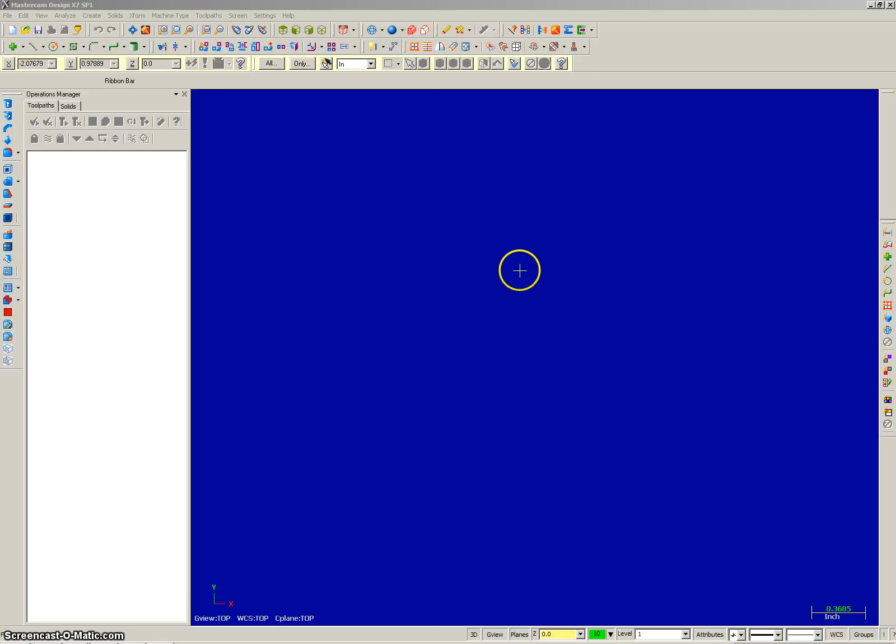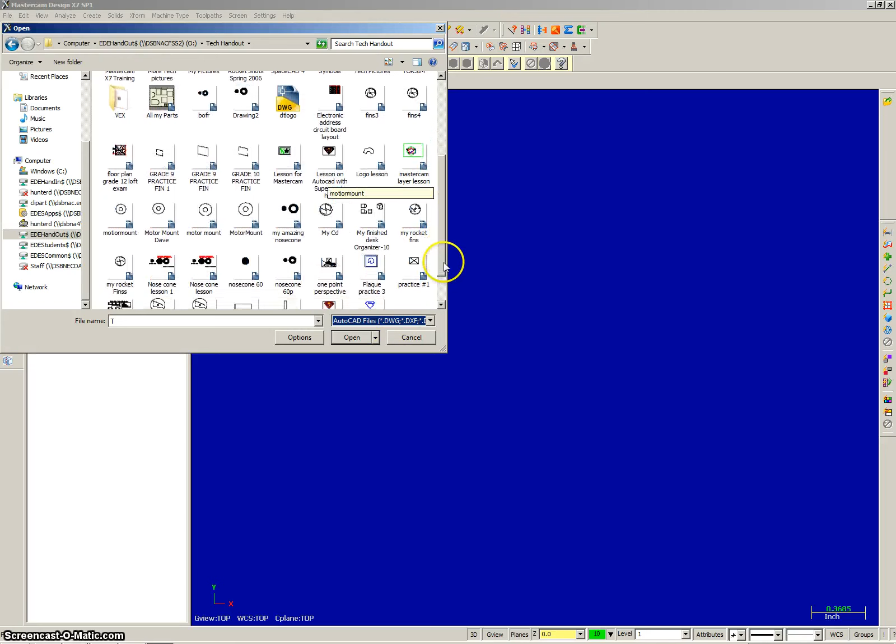We're going to grab an AutoCAD file that's already set up with tabs and a couple of fins on it. Sometimes you might have to accept the licensing agreement, but I've already done that today, so don't have to do it again. So File and Open. We're going to go to the Tech Handout folder, grab this particular file, and look for AutoCAD files. There we are. If we slide down here, you're going to see one called My Rocket Fins. I'm going to double click it and do layout number 1.

I'm going to hit screen fit, just get it nicely in the center. So we're all set. This is a CD, so it's like 4 3/4 inches in diameter. It's got like a 3/4 inch diameter circle in the center, and then these are the 2 fins for my rocket that I can mill out of that CD, and they're all set up, and that was done in CAD.

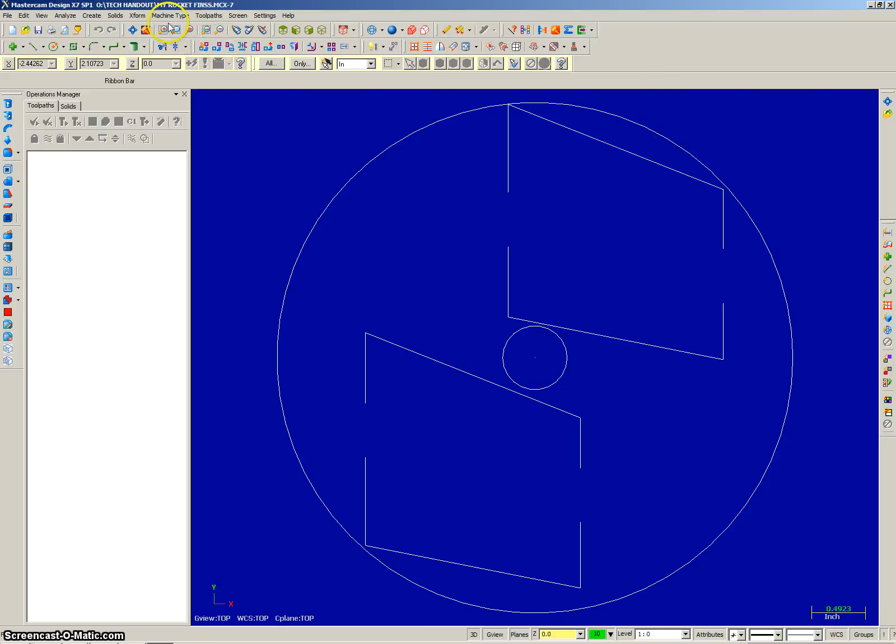We have to do tool settings next, and we're just going to call this program number 1. Doesn't really matter. The material we're going to select from the library, so it is acrylic, plastic acrylic. Checkbox it, and we're going to assign the tool numbers sequentially, although we're only going to use one tool, and it will be the 3/16 end mill.

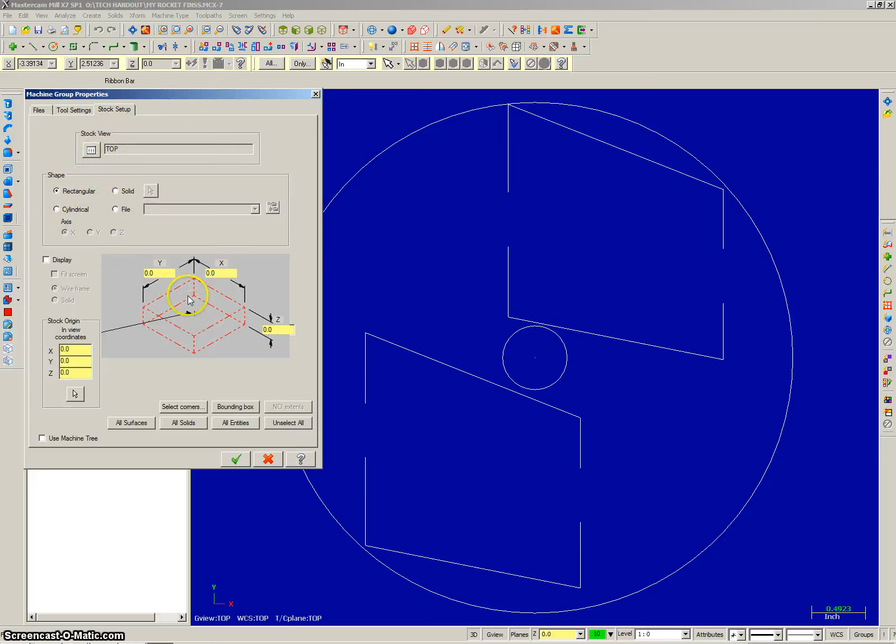Alright, that's looking good. Next is stock setup, and it doesn't give us an option for a circular setup. We are going to leave the center of the part in the middle of it right here. So in other words, this part right here is 0, 0, and this is 0, 0, 0 also. So we're just going to use 4 3/4 by 4 3/4 by 1/16 of an inch, because the CD is pretty thin.

So here we go. 4.75, 4.75, and 1/16. It allows you to use fractions if you want. And of course, again, we're going to keep the center at 0, 0, 0, and we're going to click that we want to display that.

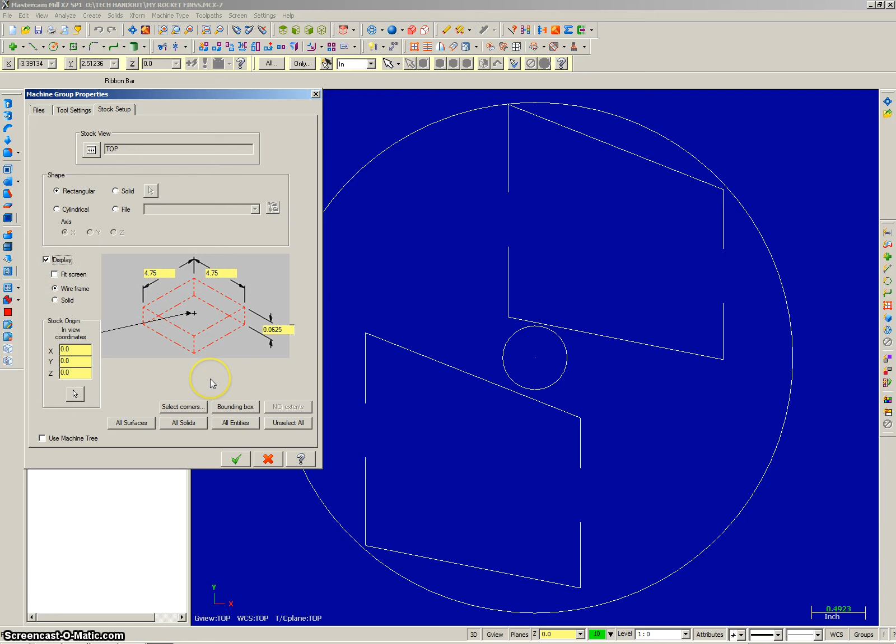And everything else should be looking good. When we check box, we should see the red box around. Now that's interesting, looks like the center's not quite at 0, 0, so we'll leave it the way it is. Maybe I'll make it 5 by 5 just so it fits in a little bit better. So I'm going to go back and modify that, we'll go 5.

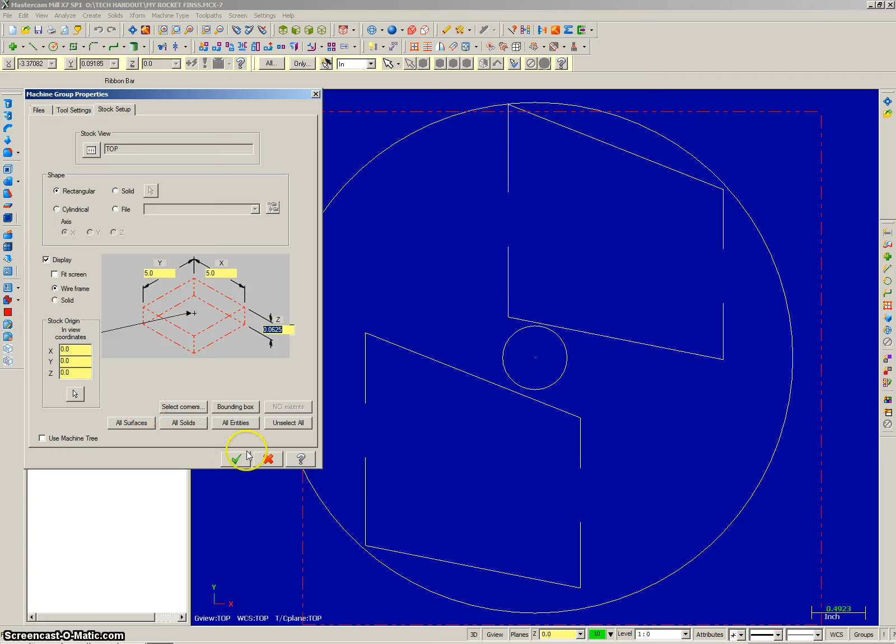Fits, generally speaking. Alright, we're ready to go. So we're going to go to toolpaths, and we're going to do a contour.

There it is, called My Rocket Fins. I'm going to check box it, and we're going to select these guys one at a time. So again, remember that this is the line segment, this is the center of the line segment. If I select down below here, then it's going to send the tool around the outside, which is what I want it to do, so that this fin will be remaining.

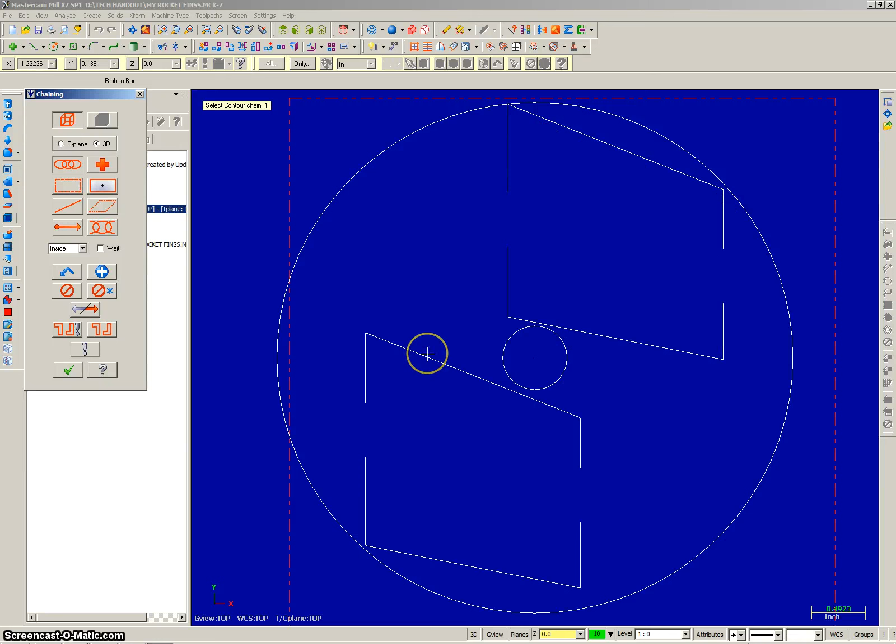So here I go, and I'm selecting it as a chain. I'm going to select the first one, it finishes right here. Then I go to this one, see, again, there's the center, and I'm above it. Click it, and it finishes here. Do the next one, click it. Again, this is a counterclockwise toolpath, which means the tool is going to go to the outside of the line, and the last one, there it is, counterclockwise toolpath.

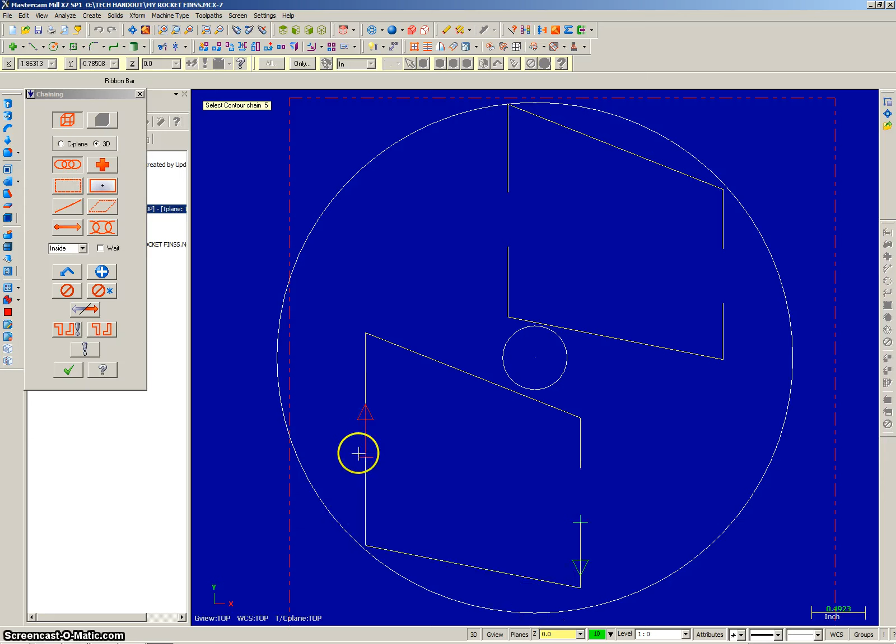So that's looking good, and if I checkbox that, now we have to do the information required.

It is a contour, we've already selected that. We don't have our tool picked yet, so we're going to go to Tool, go to the library, and go to the filter. We're going to turn them all off, so there are none.

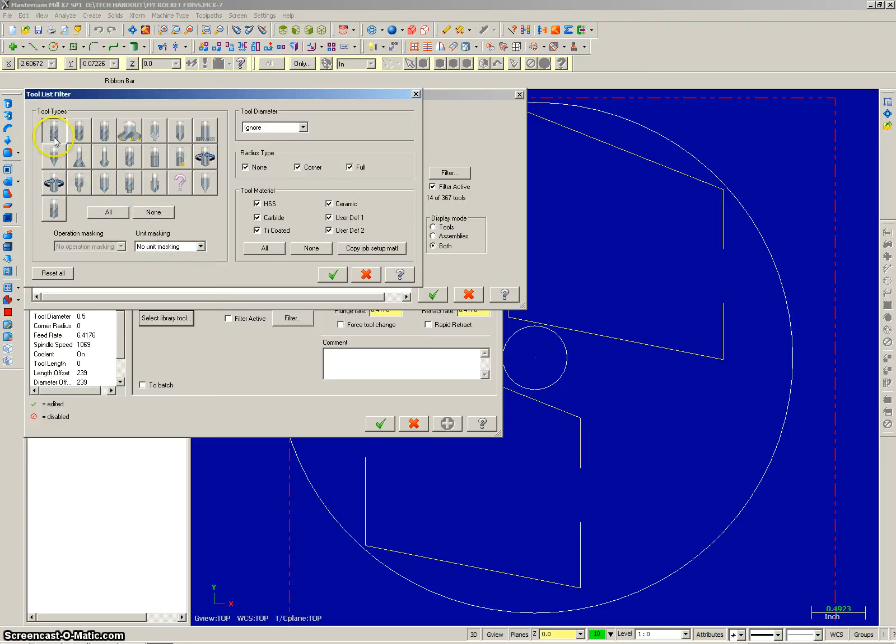Then we're going to select only the end mills. If I hover on there, see that's an end mill, and I'm going to click checkbox to get all the different end mills. We do all of our milling of acrylic pieces with the 3/16 flat end mills. I'm going to select it, checkbox. And so now I have the tool, and now I have to change the speeds.

Mill at 40 inches a minute is the feed rate, so 40, and then the plunge rate is 10, and the retract rate is 60, top speed.

I also recommend that you write a little note, so we're going to put down 0.15 inches with a 3/16 inch tool. Again, a comment is always good, especially when there's a lot of tool paths and things get more complicated.

Alright, so that looks really good, that's done, that's the tool finished. I'm going to go here to cut parameters. I'm going to make sure the computer is on, and I'm going to make sure that I do center compensation. Tip compensation should be set to center.

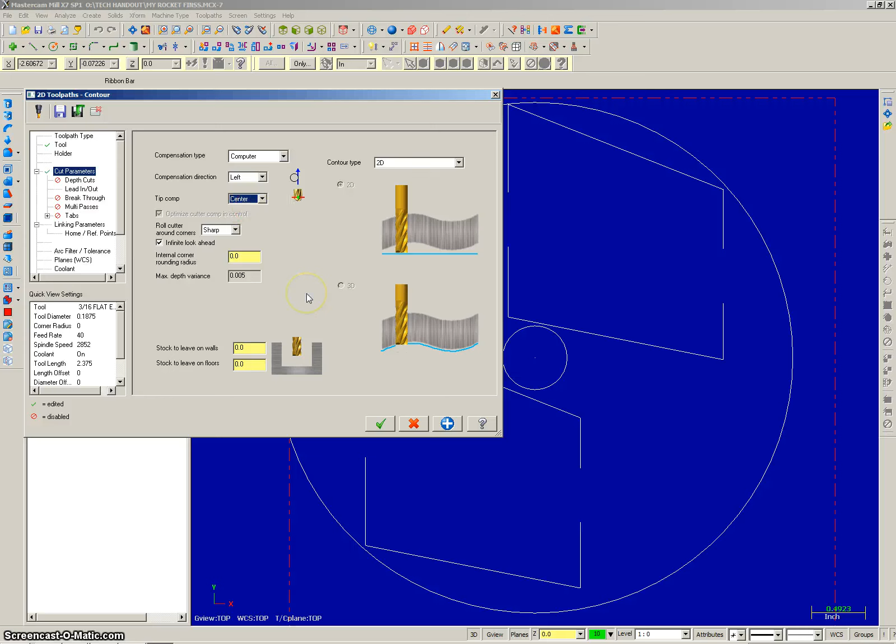That's done. I'm going to go down here to lead in, lead out, and turn it off. We don't need lead in, lead out turned on because we're just doing simple cutting of parts.

And then we're going to slide down here to linking parameters, and we're going to put in the depth that we want to mill these fins out of the CD at, which is minus 0.15 inches.

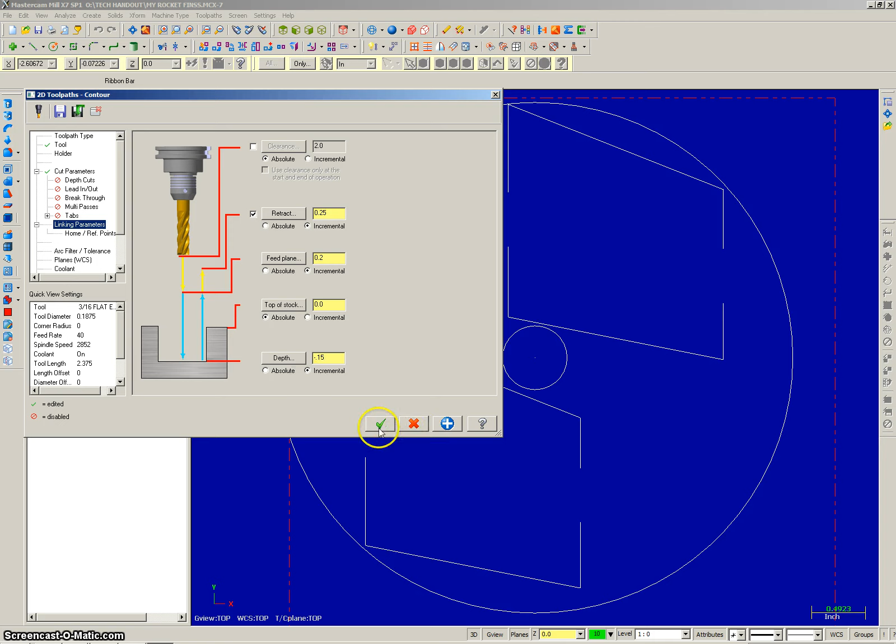And now we're done. So if we hit the checkbox, you can actually see there's the center of the tool going around the fin, lifting up, and then going around the next part of the fin.

Again, these are tabs, and they would be 3/4 of an inch wide in order for the actual fin not to fly out of the CD on the machine. And there's my other fin down here.

So if we want to virtually check it out, we're going to go select all and check it out virtually. So it's just processing that.

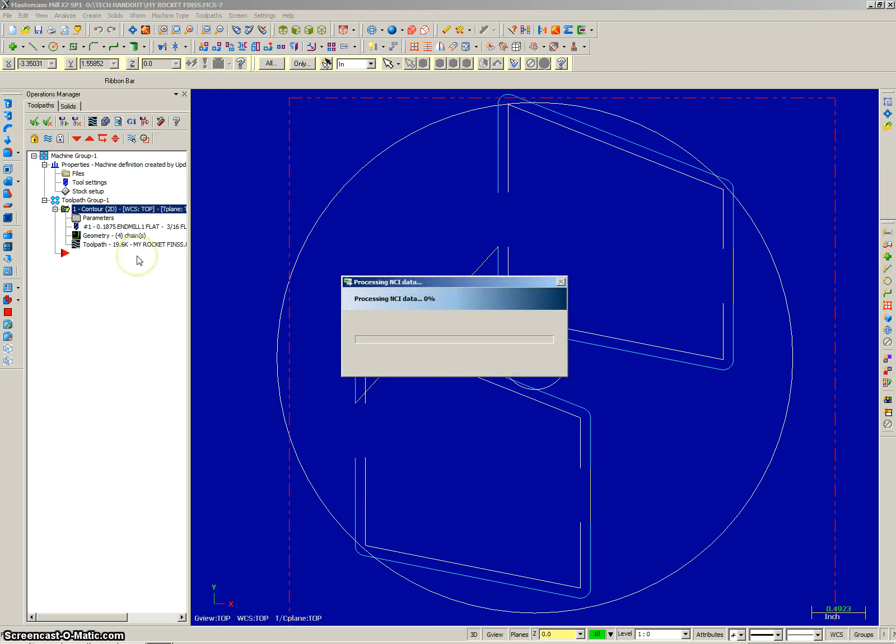So we should get a nice 3D view here. I'm going to maximize that, and go isometric. There it is. And then I'm going to play it. And there's my fins being cut out with their tabs.

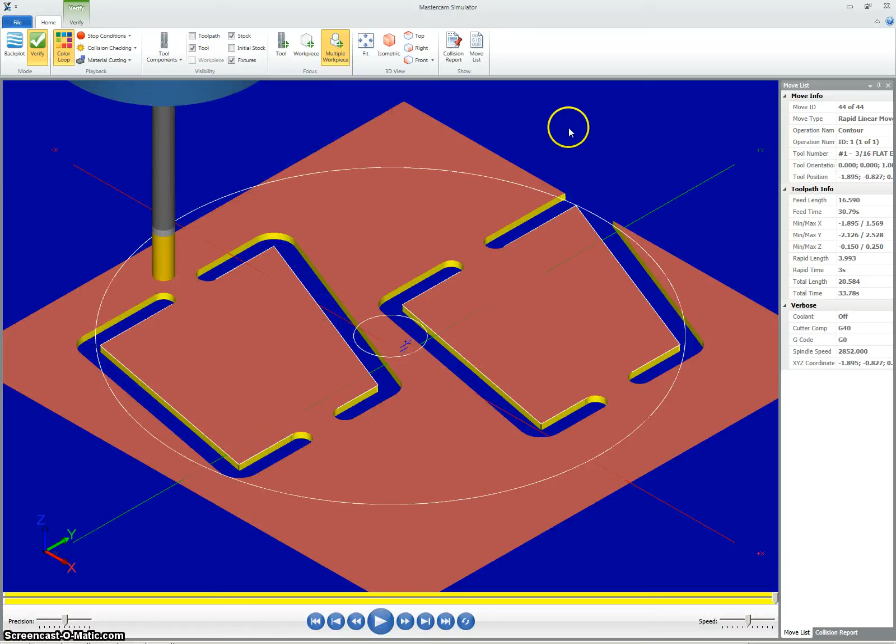Things look really good, so I'm going to close that down. And I'm going to do select all, and I'm going to post it up. So there's the post already picked. Checkbox. Wants to know what I'd like to call it.

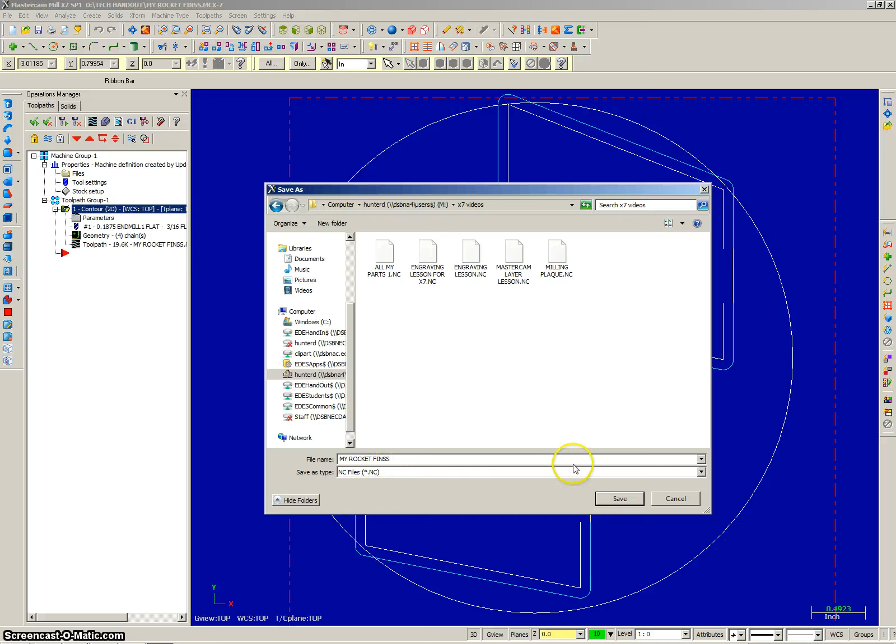I'm going to put it in my M drive. So my rocket fin seems fine. Maybe I'll lose the extra S. There we go. And save it.

And if everything goes well, it's going to take those toolpaths and convert them into G-code. Again, G-code's universal, so you could use it anywhere. And then I'm going to just change that one last line, and then I can save it to my M drive and a memory stick and take it over to the machine and mill out my fins.

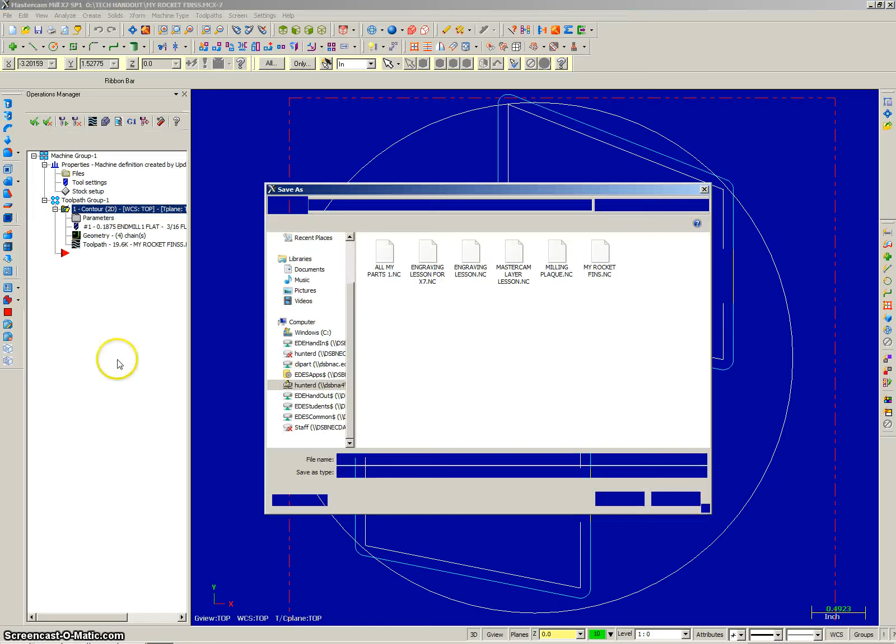So hopefully it's percolating away. Oh, maybe I'll try one more time. Not sure what happened. Select all and post. And go. And save.

There it is, the code expert. So there it is, I've got my G code. I'm going to slide down to the very bottom of it, right here to the M05, and I'm just going to put in the home position, X0, Y0, Z1, and once that's done, I can resave that.